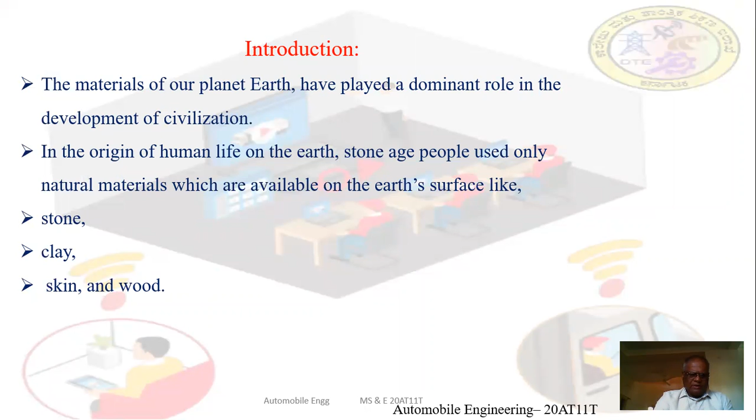Then, how was the usage of this material enhanced in accordance with the requirements of human beings? When people found copper and how to make it harder by alloying, the Bronze Age started about 300 BC. Very first, people found brass and they learned how to harden it. Likewise, it was started about 300 BC.

The usage of iron and steel, stronger materials that gave advantages in wars, started about 1200 BC. That means harder material. Normally, iron was used to make swords, equipment for war. It started during the year 1200 BC. Likewise, the usage of materials increased according to the requirement of human beings.

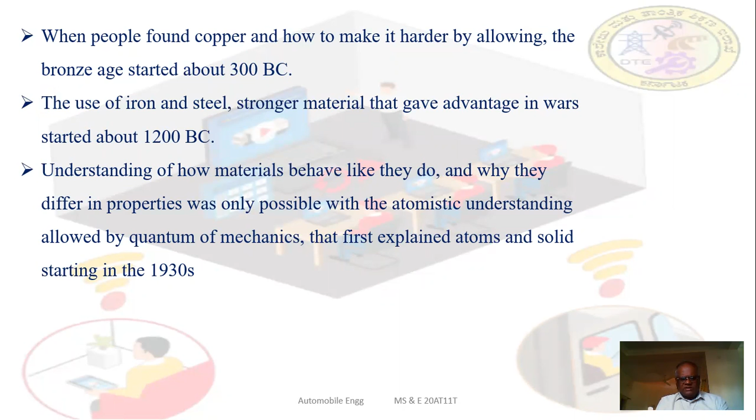The material science and engineering actually started during the year 1930, when scientists found the construction, formation, and molecular bonding of metals or materials. It started during that year, 1930.

Before learning the engineering materials, what actually are the engineering works? We know the construction of machines, construction of engines, construction of ships, construction of aeroplanes, construction of buildings, construction of roads. These are all engineering works. All these works need some kinds of materials.

That means the engineering works need materials. The materials which are used in engineering work are all called engineering materials. Vast kinds of materials are available on the Earth's surface, even inside the Earth's crust. For the systematic study of these materials, they are broadly classified into three categories.

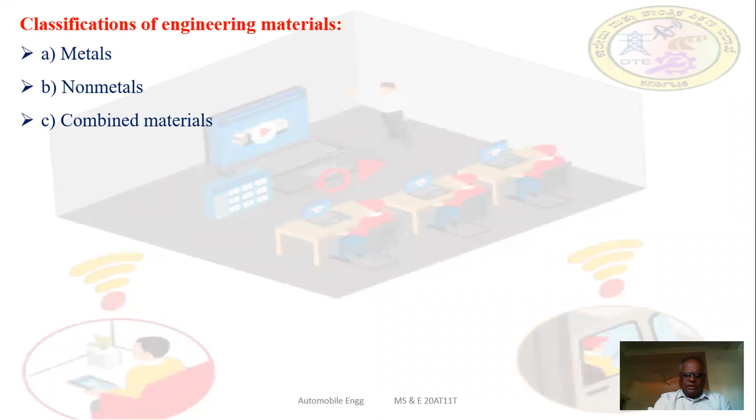The first category is metal, the second category is non-metals, and the third category of materials are combined materials. Let us learn metals. Metals are further divided into two categories: ferrous metals and non-ferrous metals.

Ferrous means iron. A metal, if it consists of iron percentage as one of its constituents, then that metal we are calling a ferrous metal. It also consists of some percentage of carbon. I repeat, any metal which consists of iron as one of its constituents - and carbon is also one of its constituents - then that metal we are calling a ferrous metal.

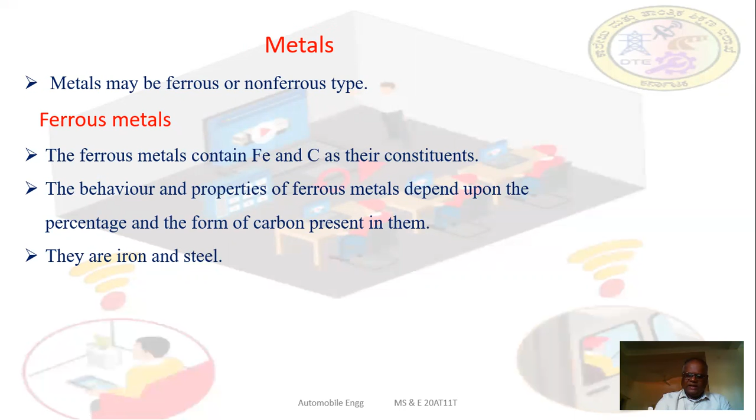The behavior of ferrous metals depends upon the percentage and the form of carbon present in them. In which form carbon is present and what percentage of carbon is there - that explains the behavior of that metal. Examples of these ferrous metals are iron, steel, cast iron, and high-speed steel. These are all coming under ferrous metals.

Next is non-ferrous metal. It's quite natural that non-ferrous metal will not consist of any kind of iron in it. Examples of these non-ferrous metals are aluminium, copper, silver, zinc, nickel, tin, chromium, lead, etc. As you all know, aluminium, copper, silver, and gold are good conductors of electricity.

What is a good conductor of electricity? Any metal which freely allows electrons to flow through it, that metal we are calling a good conductor of electricity. Through any such metal, electricity can easily flow. Normally, good conductors of electricity are also good conductors of heat.

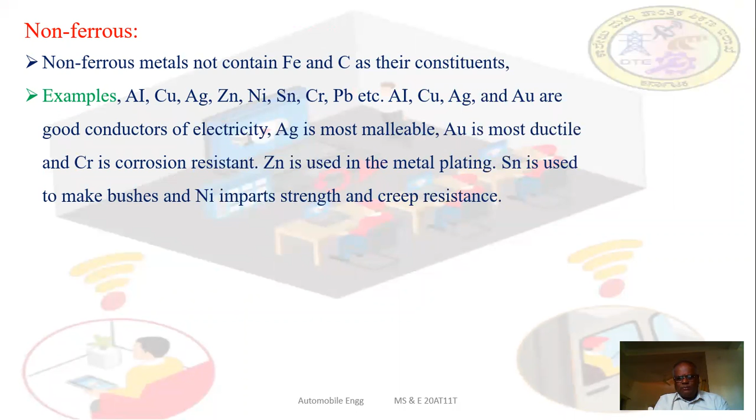Zinc is used in metal plating. Tin is used to make bushes, because it is one of the harder materials. Nickel imparts strength and creep resistance. This is all about non-ferrous metals.

Now let us come to non-metals. Non-metals are generally metallic or non-metallic oxides, normally called ceramics. Ceramics are physically separable and chemically homogeneous constituents of materials consisting of phases, also called ceramics. Examples of ceramics: rocks, fire clay, fire bricks, cements, ferrites, garnets.

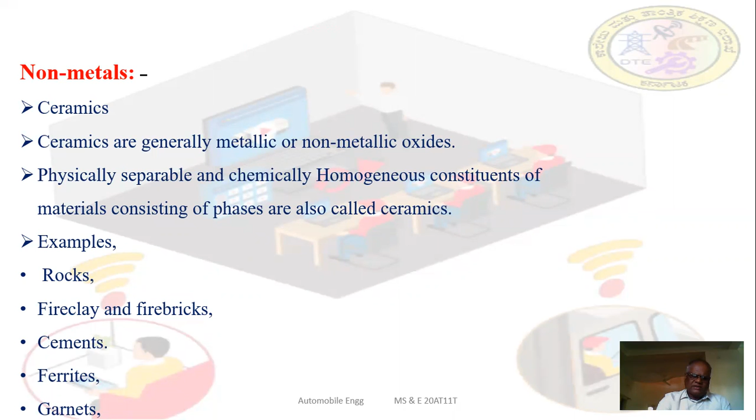These are all coming under non-metals, which we normally call ceramics. The next category of materials is organic polymers.

Organic polymers are derivatives of hydrocarbons, consisting of covalent bonds formed by carbon. A covalent bond is how molecules are bound together, one of the types of bonds that bind molecules. Covalent bond is one such bond, where carbon chemically combines with oxygen and hydrogen.

Polymers are obtained from monomers bonded by chemical reaction. Polymerization is the combining of one or more types of materials together to obtain another product. Organic polymers are relatively inert, meaning they will not react easily with other materials, and they are light in weight with a high degree of plasticity. Bakelite, polyethylene, nylon, and Teflon are examples of organic polymers.

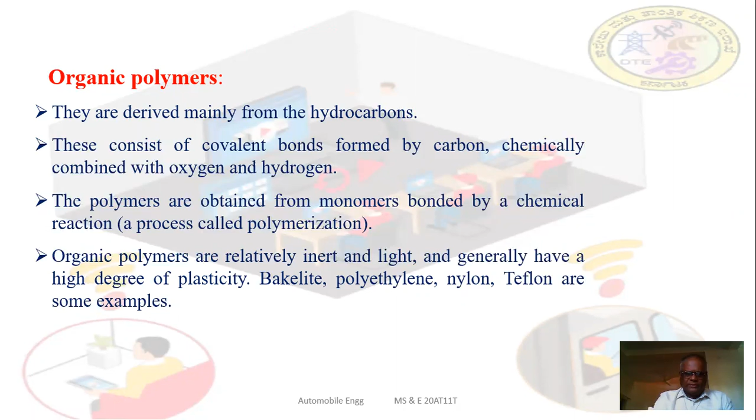Next is combination materials, meaning combining two or more materials, metals or ceramics together, which we call composites. Composites are normally one or two metals or materials combined together to obtain a single product, which we call composites.

Composites possess properties quite different from their alloys, whether ferrous or non-ferrous, depending upon the base metal used. Examples are stainless steel and high-speed steel. Non-ferrous alloys include phosphor bronze, brass, beryllium, babbitt, etc. Instead of metals, alloys may also be used to make composites.

These are mixtures or combinations of any sort of materials together. The constituents of composites are called reinforcing, and may be in particulate form, fiber form, or flake form. Flake means laminas.

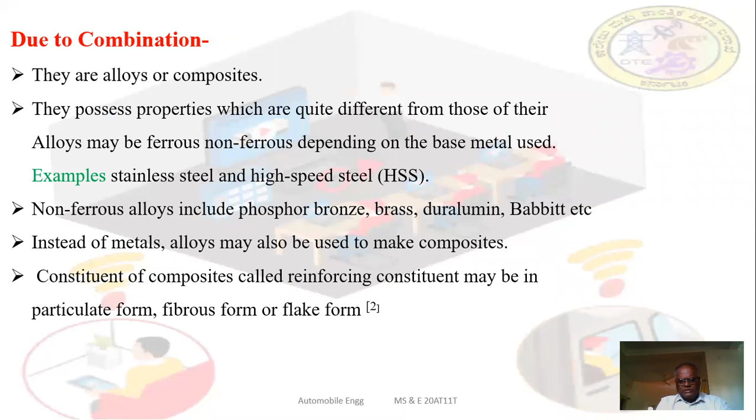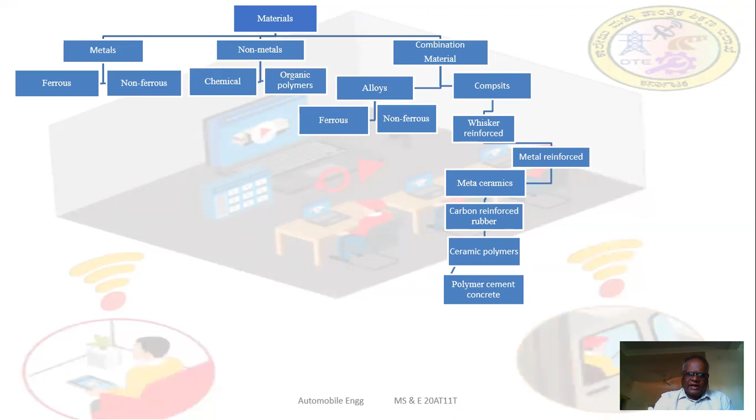Now, selection of material for engineering purposes. Materials used in engineering works are called engineering materials, but not all materials can be used in all engineering works. A single metal or material cannot be used in all engineering works, meaning a particular material is to be used in a particular or definite engineering work. While selecting materials, the properties of the material should be known.

The first property is mechanical property - whether it's brittle, harder, or ductile; these mechanical properties have to be known. Physical property - whether it's a liquid, solid, or semi-liquid - should also be known. Then chemical combination, how it forms, how it works, and dimensional properties also have to be known.

The second criterion is availability of the material. While selecting material, it's very important that the material which is available freely and nearby, or in hand, or to be ordered, is selected. Limited supplier, special storage and processing are all criteria to be taken into account.

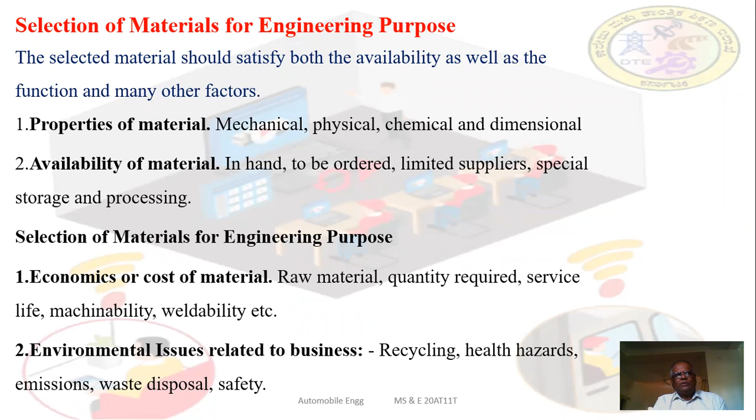Waste disposal. As you know, after usage of any sort of material in engineering work, one day after its lifespan it becomes scrap. How that scrap can easily be disposed of, that also has to be known. The main criteria is that the material used is providing safety to the engineering work or safety to human beings.

Next is the selection procedure of materials for engineering purposes. What procedure has to be maintained in selection of materials for engineering works? First, we have to collect the data on which type of materials and metals are available, what may be its cost, and what quantity of material is available. This is the data regarding the material.

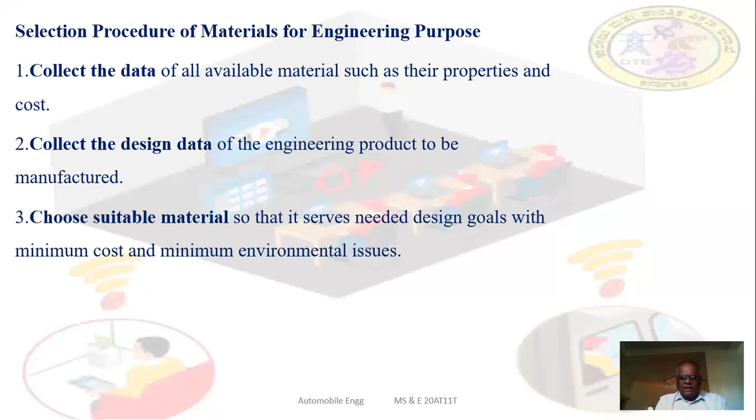In accordance with that, we have to know which type of product will be produced in the engineering work. That is what we call the engineering data. Compare this engineering data with the available material, and then the materials which are feasible for that engineering work should be selected. That means choosing the suitable material so that it serves the needed design goals with minimum cost and minimum environmental issues. Okay, you have learned all these things.

Let us have a look into some of the multiple choice questions.